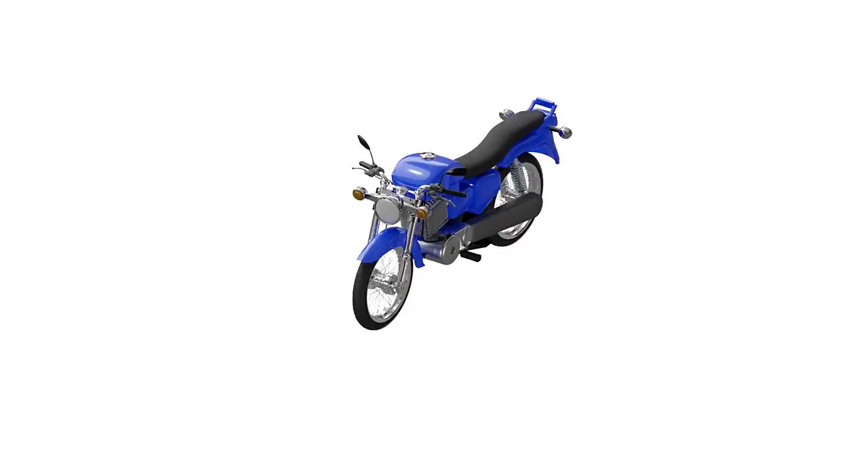The clutch is one of many essential components of a motorcycle. It is operated by pulling or releasing the clutch lever with the left hand. Before going into the details on how a clutch works, let's see how it is assembled in motorcycles.

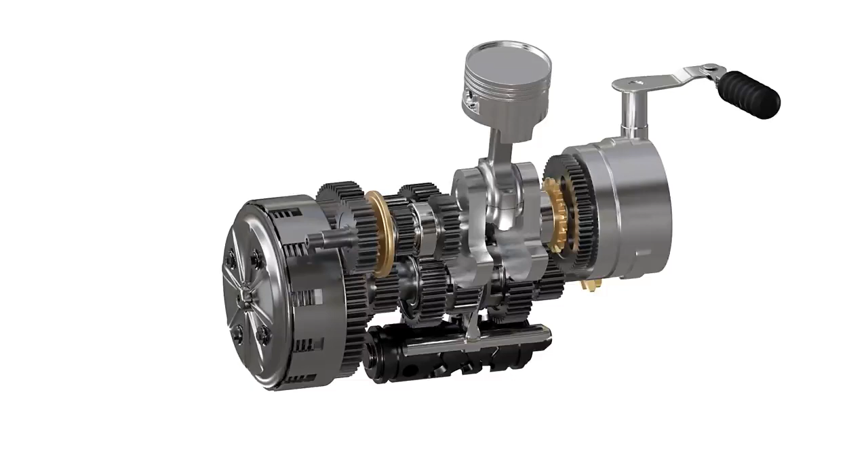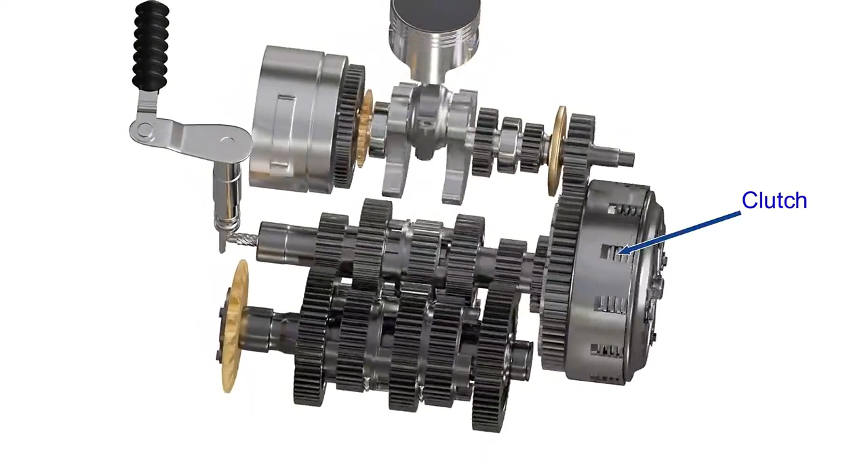The power from the engine is converted to rotary motion by the crankshaft. This power is then transferred to the clutch housing. The clutch assembly transfers power to the input shaft of the gearbox, which is then transferred to the output shaft and eventually to the rear wheel of the motorcycle.

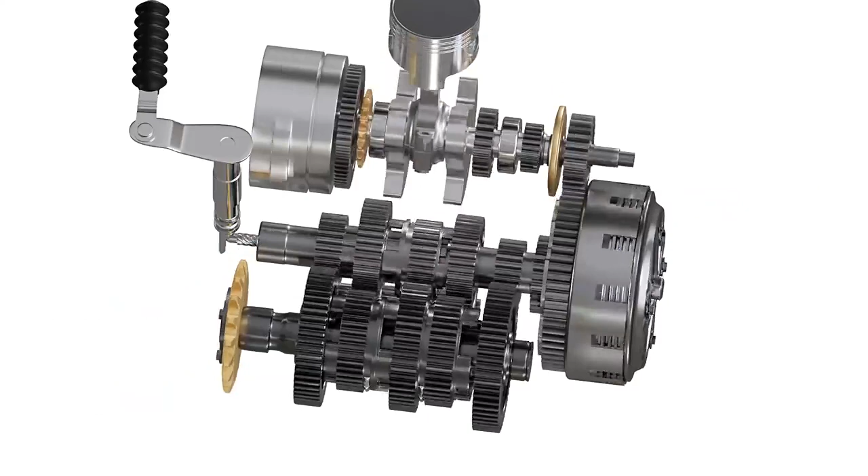The clutch assembly itself is a combination of several parts. It consists of a pressure plate held in place using several springs and screws. This plate presses against the clutch pack, which consists of several steel and friction plates placed in alternate positions. The clutch basket and the inner hub are assembled with their axes aligned to the input shaft of the gearbox.

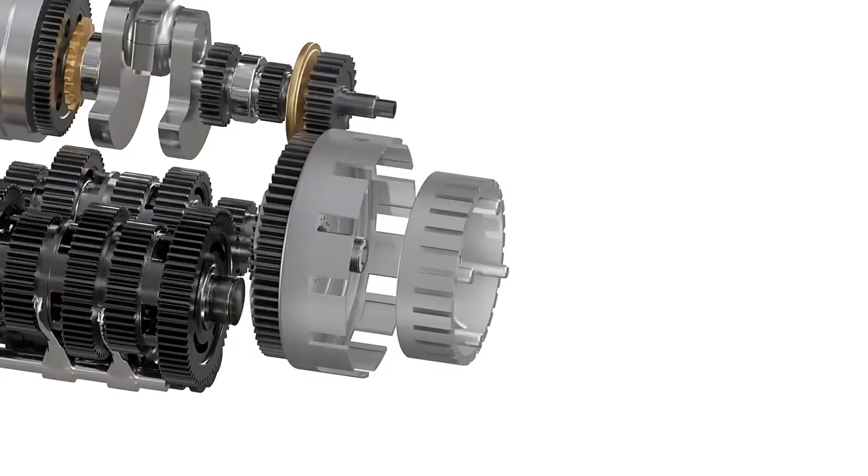Now let's understand how a clutch works. The clutch basket freewheels with respect to the gearbox. The engine power will spin the clutch basket, but it will not transfer any power to the gearbox. However, the inner hub is connected to the input shaft of the gearbox. If we spin this inner hub, it will also spin the gearbox input shaft.

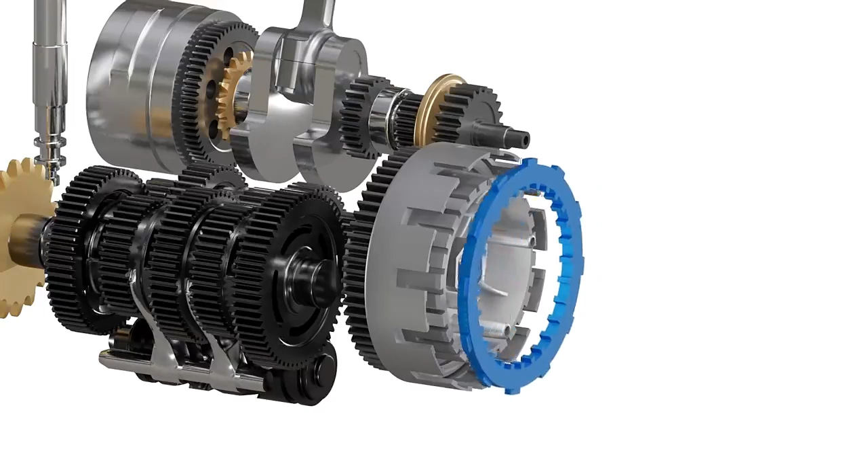Let's take a hypothetical connector with teeth on its internal and external portion that can interlock with both the clutch basket and the inner hub. If we insert this connector between the clutch basket and the inner hub, we can spin both of these at once and the engine power reaches the gearbox. If we remove this connector, the clutch basket and inner hub will be independent again and the engine power is disconnected.

But there is a problem with using this connector. When it is removed, the inner hub spins due to inertia of the motorcycle rear wheel, and the outer basket spins due to engine power. This is why these two components start spinning at different speeds.

In order to interlock with both of these non-synchronized spinning components, the hypothetical connector would have to spin at two different speeds at the same time, which is impossible. For example, if it matches the inner hub speed, interlocking this connector with the outer basket will be either impossible or too difficult. To eliminate this problem, the clutch pack is used in place of this hypothetical connector.

Unlike our hypothetical connector, the clutch pack is a combination of separate circular plates. Let's take any two adjacent plates from the clutch pack - one is a friction plate and the other is a steel plate. The friction plate has teeth on the outer circumference, which always interlocks with the clutch basket and can slide sideways along this clutch basket. The plate spins with the clutch basket, but doesn't affect the inner hub.

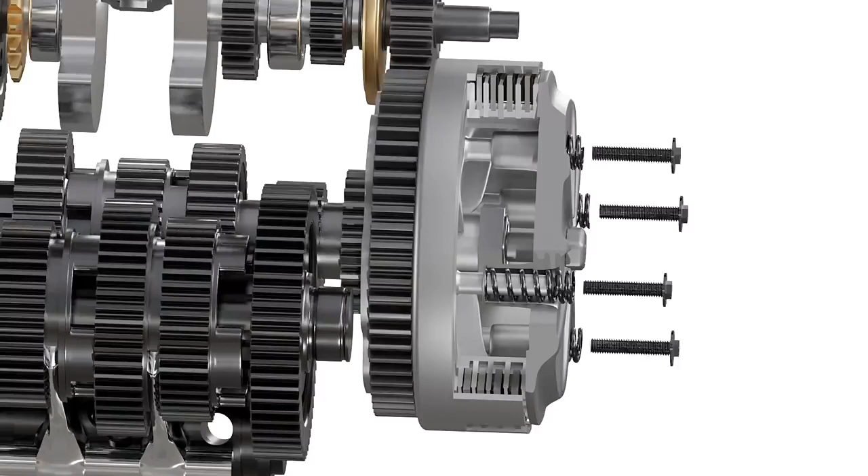Now let's understand how pressure on these plates is changed while riding a motorcycle. We use the pressure plate for this purpose. It has ducted attachments where a set of springs can fit in. A set of retainer bolts are screwed to the inner hub. This causes the spring to compress and apply force on the clutch pack, resulting in sufficient friction between the plates.

We can release the pressure on the clutch pack by pushing the pressure plate outwards. We can control this pressure by pulling or releasing the clutch lever.

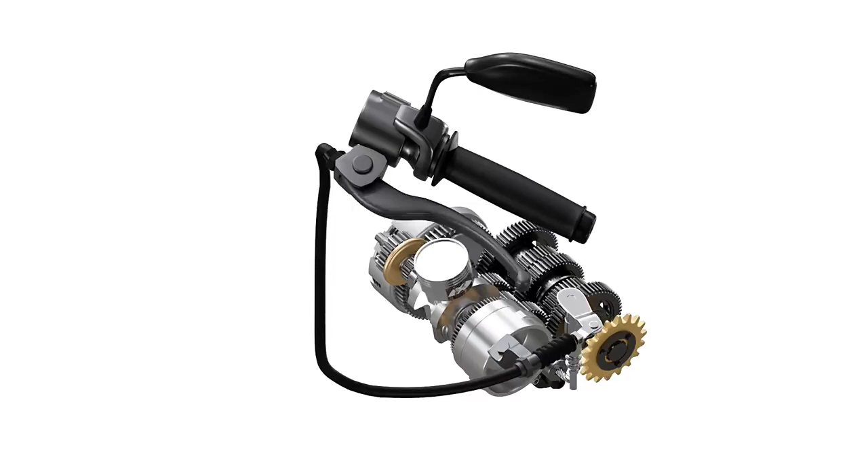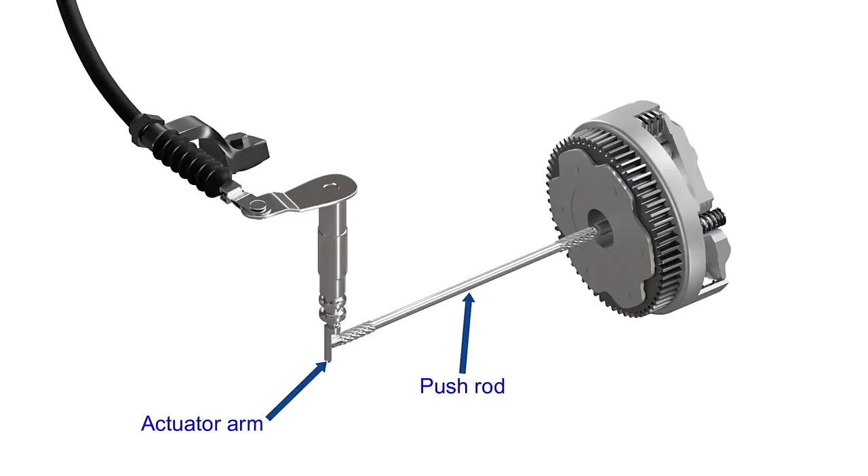As the clutch lever is pulled or released, a cable or hydraulic system rotates an actuator arm, as shown in the animation. This arm presses against the push rod towards the clutch. This rod goes through a duct inside the input shaft and pushes the pressure plate, releasing the pressure on the clutch pack.

When the clutch lever is released, the springs again apply pressure to the clutch pack, as shown in the animation.